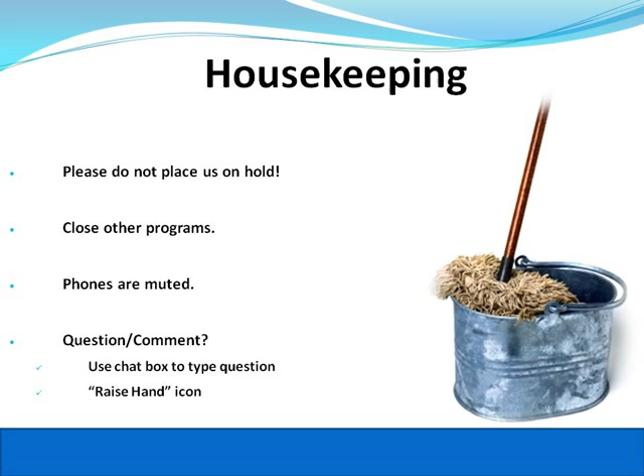Hello, I'm here. Thank you very much for listening, and you'll have the good chance that you'll have a recorded session with my Swinglish accent. So I'm glad to be able to talk about gasification and mass burn comparisons.

I would just like to jump into the first screen. So if we compare technologies in a general way, obviously we have to look at various things. One of it is obviously the criteria under which we compare two technologies or two solutions. And those criteria mentioned most in the waste management industry obviously are diversion rates or emissions, as well as energy efficiency.

Also, if we want to do a comparison, we have to look at the method, how we compare two different solutions or technologies. And the method that I would like to show here is basically looking at trying to make sure that we use the same boundary limit and same assumptions for those comparisons, and we'll have a heavy focus on detailed mass and energy balances within that same boundary limit to compare various solutions and methods. And that's exactly now where I have to put a first disclaimer about the content of that presentation.

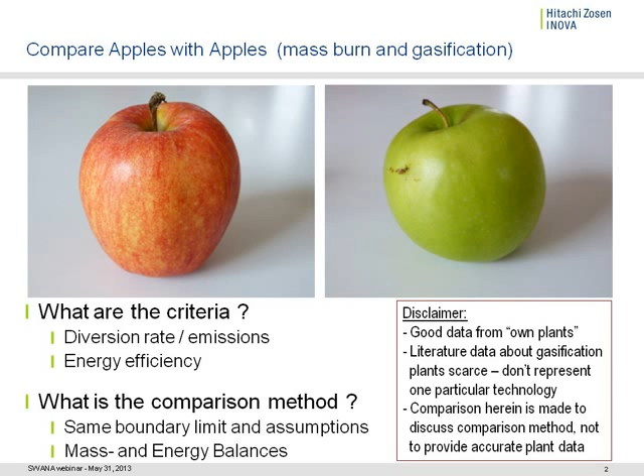So let's first look at the first topic, which is define the boundary limits. And I think for me, it's very important that you fix those conditions for all the comparisons.

What I did in this comparison, I looked at the MSW feed that we typically see as delivered from curbside collections. Then we also have to include consumables, reagents, and other utilities used, and these could be very different for different technologies, but it's important to consider all of them in the comparison. Then we have to look at the residues which go to disposal and at the recycled products.

In some areas, and depending on legislation, it's not always clear what products out of the system are considered a recycled product or have to be considered a residue for disposal. This depends a lot on legislation and on established routes for a certain product in the market.

Then also we have to look at emissions, and it's very important here that we have to look at emissions after the work is done. I've seen a lot of people that compare different technologies and say, well, I am producing only a syngas, I have zero emissions. I don't think that's the full system that we have to compare here, because at the end sometimes a syngas or even a liquid fuel is combusted to produce the work it's supposed to produce.

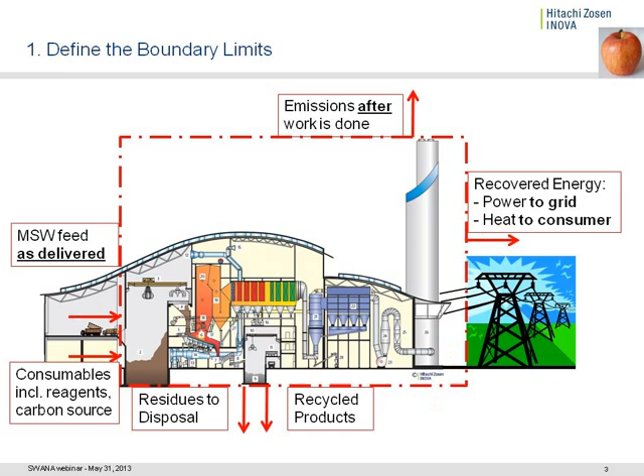Now, we have to also, if we want to do a comparison, define the feed stream. And in all the comparisons, we have to use the same feed stream.

In this comparison, I've used an ultimate analysis that you can see here, which is typical for some curbside collected waste. Important also to see that the heat value for any comparison has to be clearly defined or recalculated during the comparison. Also, the dimensions are an important factor.

If I see usually feed that's delivered from the curbside, it can contain particles or elements up to several feet of size, can be bulky or in bags. Whereas I've seen comparisons that assumed that already the feed stream is a little fluffy RDF type treated product.

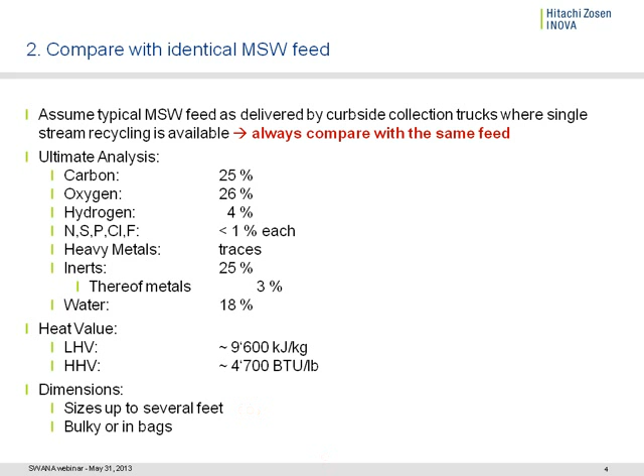Mass balance considerations obviously not only have to consider the ultimate analysis and total mass balance in terms of total mass stream, but for all the mass balance considerations, we also have to look at component mass balances. We will go into a little bit further detail about component mass balance considerations.

Important here is that for every component or contaminant that we have in the feed stream, in the waste stream, we have them—we cannot just choose not to have them. We have to know for each step what the distribution coefficients are, why would that contaminant go this way or that way, and so at the end we know where these contaminants end up in the process.

And I've seen one question—LHV stands for lower heat value, which is typically the method used in Europe. And HHV is the higher heat value, which is typically the method used here in North America.

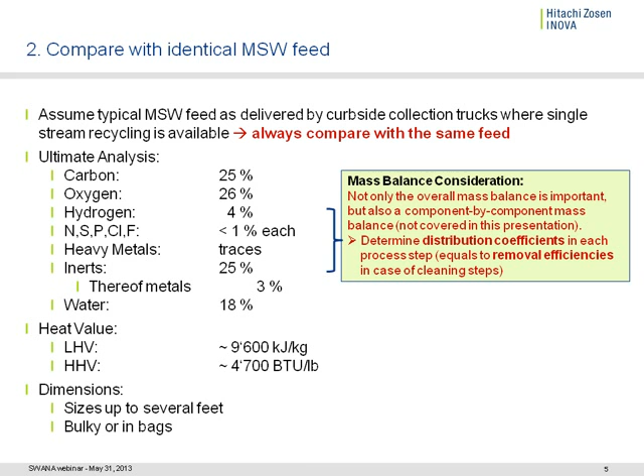Now, for energy balance comparisons, it's very important that we use exactly those heat value numbers. If we look at an LHV basis, basically the LHV basis assumes that at the end of the process all the water is still in a vapor phase, although the energy basis for that comparison is typically either 0 or 20 centigrade, which is 32 or 68 Fahrenheit—that's typical the comparison temperature level for all these energy considerations. So actually water would be naturally in its liquid form for this comparison.

But since for energy purposes, normally the water is always in a gaseous form in the flue gases as a vapor.

The LHV concept assumes from the beginning that the water for the comparison method is not considered to be in a liquid form but in a vapor form. So comparing on an LHV basis, these 9,600 kilojoules per kilogram would translate directly to 2,427 kilowatt hours of energy per short ton of waste.

Looking at those numbers, if someone says this figure is frequently used, that someone can produce more than a megawatt hour per ton of waste, then with this waste typically received from the curb, that would correspond to 41% total net energy efficiency.

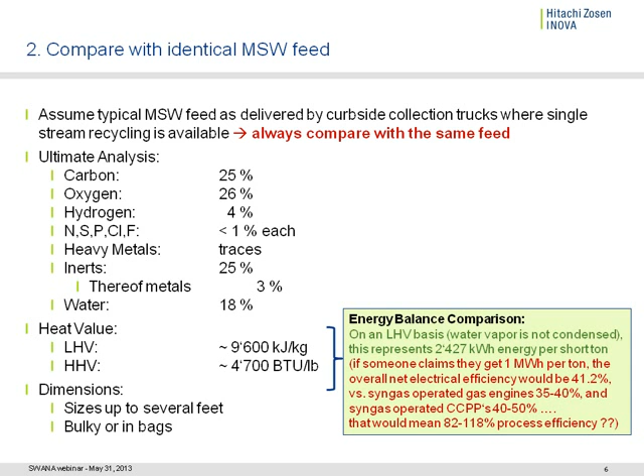If someone just says they can produce a megawatt hour per ton of waste, it's very important to look at the assumptions: what waste has been assumed, what heat value of the waste has been assumed, and what other assumptions are considered. Now let's start with a modern mass burn example.

We built a unit in 2011 in London, the Riverside unit, located next to the Thames River. It has 3 combustion lines, each about 840 tons per day. It uses MSW as delivered and collected by the collection vehicles in the city and area of London. They bring it to the transfer stations.

They bring the waste onto barges on the Thames River. The barges deliver it to the plant, and it generates steam and electricity. It's prepared for cogeneration, so in the future steam could also be used, but at the moment this plant produces about 73 megawatts gross, and can sell about 65 megawatts to the grid, which corresponds to 662 kilowatt hours per ton of the same typical MSW I've used before as a basis for these comparisons.

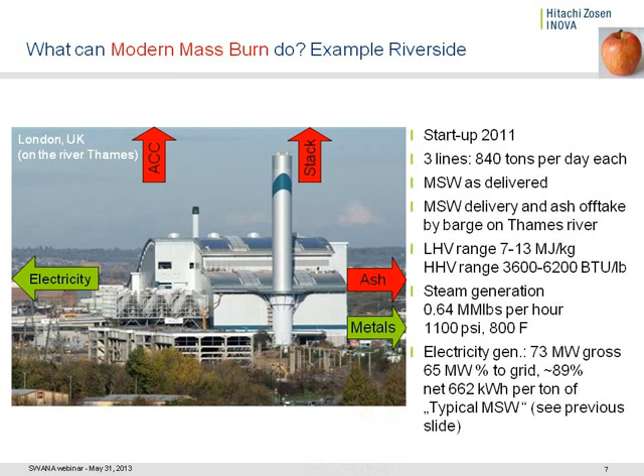So let's go a little more detailed into these mass balance comparisons. I always like to see graphical comparisons like the Sankey diagram, which I find very helpful.

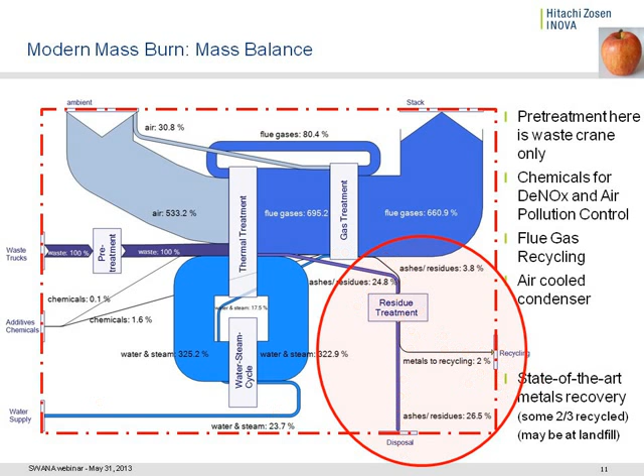Let's now go to the energy mass balance, and you'll probably see, if you compare to the previous stream, I go back again to the air streams here, where you see that the air streams are the biggest streams in terms of mass. You will see on this Sankey diagram for energy balance that here the air stream at ambient temperature actually contains no energy.

So again, this energy balance is based on a lower heat value basis. It's made under the assumption that the water in the waste is just reducing the heat value, and that the water vapor in the flue gas stream contains no energy.

In this case, we have the waste trucks coming in with the waste, and again, we normalized the energy content of all the streams, the energy streams in the whole system here, such that all the energy, the chemical energy content of the waste, is 100% of the energy.

So in this case, we also have the chemicals again. In this case, we considered the chemicals' energy content is close to zero. They are at ambient temperature, and the little chemical energy contained in, for example, the ammonia which will react, is assumed or neglected in this case.

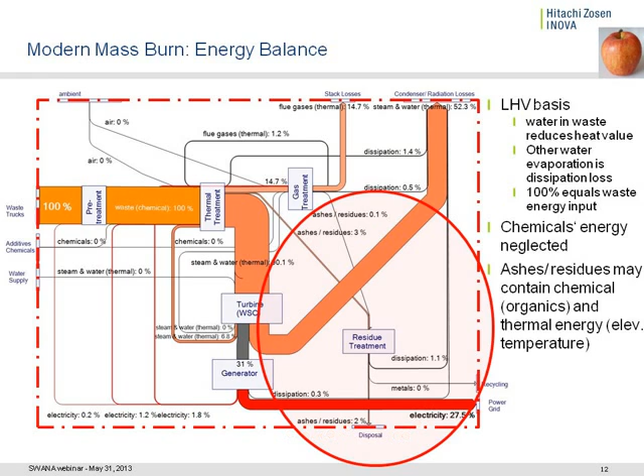As a next example, we have used a few technological improvements that we did in the past, and which we will apply to one new plant to be built in Lucerne, Switzerland. That allows us to further reduce the excess air, also further increase the energy efficiency.

We have also used some other concepts, the ThermoRe concept, in this plant in the UK, where we would propose a dry bottom ash extraction, which allows us to further reduce the energy lost with the organics in the ash, and further cool the ash, reducing thermal energy losses. We also increased the metals recycling rate with this concept, and we assume in this case that even the mineral fraction of the ash can be recycled at 50%.

This is today possible in certain legislations, but not all. It very much depends on the legislation whether the mineral portion of the ash can be beneficially used, or whether it has to be considered a residue that goes for disposal and therefore doesn't contribute to the diversion rate of the whole process.

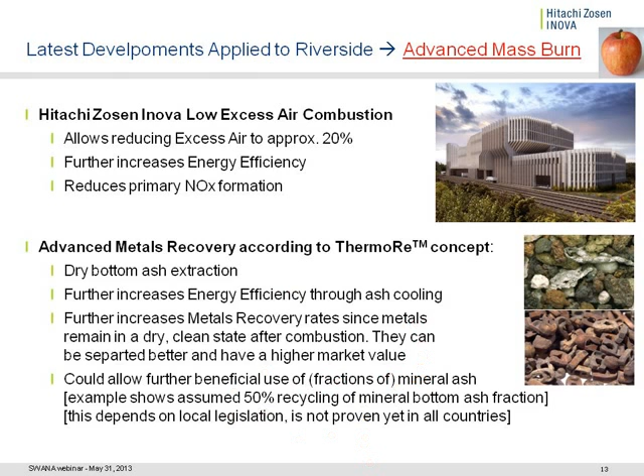If we apply those two recent developments to our UK unit, we'll have again a very similar mass balance diagram, with a few little changes. One is that because we can reduce the excess air for combustion, we'll need a lower amount of air and have a lower amount of flue gases leaving with the stack. While this number was 660% in the previous example, here we have only 570% total flue gas stream mass flow compared to the total waste mass flow.

Also, the ThermoRe concept allows some changes in the residue treatment area. While last time we had only 2% metals recycling, here we assume we can recycle virtually all the metals, certainly 90% plus of the metals contained in the waste stream. We also assume we can recycle about half of the mineral fraction, which, however, needs to be confirmed and may be different from country to country depending on the legislation.

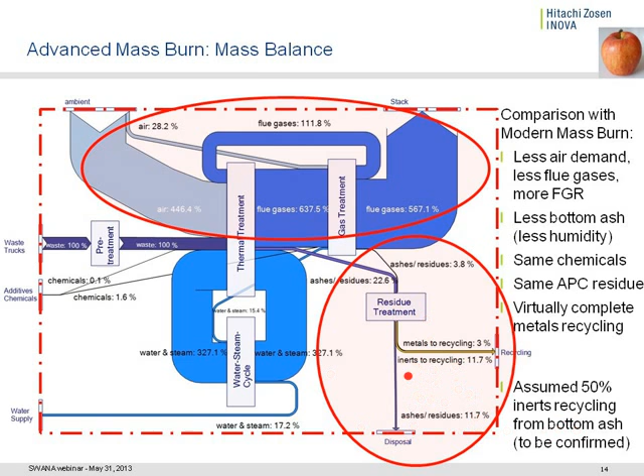This would be the mass balance diagram of such an advanced mass burn unit. Let's go into the energy balance side of it. If we look at the energy balance of a modern unit,

we would see that the stack losses here could be reduced. With less excess air and less mass flow going through the stack, we also have less thermal energy losses through the stack. Because we have less excess air and less flue gas flow, we also have a lower parasitic load to drive the fans in the flue gas treatment.

In the residue treatment, because we can recover the ashes in a dry form and recover some thermal heat of the ashes, we have less energy losses with the ashes. We also have less energy losses because the burnout is better, with less chemical energy or organic materials in the ashes, which in a normal waste-to-energy plant are maybe only 2 to 3%, but with this technology you could typically go down to 1 to 2%, which can all be measured.

Looking at all the little improvements on the parasitic load and the losses with the flue gases and the ashes, this would give an overall electrical efficiency up from 27.5 to 28.2% electricity available to sell to the grid, compared to the chemical energy contained in the model waste assumed for all these comparisons. If you want to use that 28.2% figure in comparison with other processes, there is one plant in the Netherlands, AEB Amsterdam, which has used

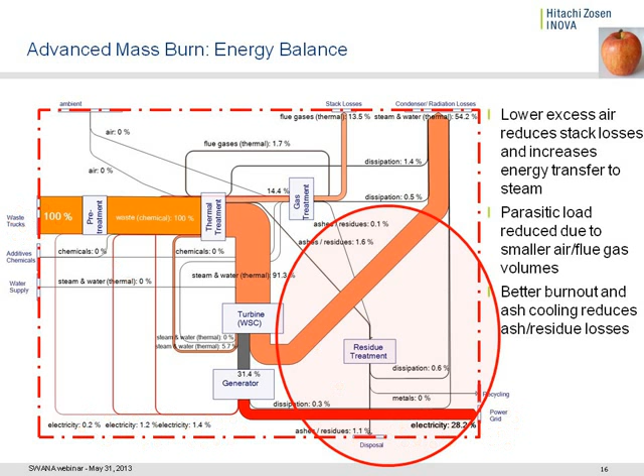I mentioned at the beginning that we don't have to look only at mass balances in terms of total mass flows, total mass streams, being where does my one ton of waste end up, but we also have to look at the component mass flows if we compare different systems with each other.

There has been a pretty thorough analysis of the total mercury system in Austria recently, and they have looked at just mercury. Where does mercury enter my country? Where does it leave the country, either to the air or to any landfill space? They figured out that about 10% of the total mercury in the loop in Austria at the end somehow ends up in municipal solid waste. So there's an amount of mercury coming in with your curbside collected waste. If I recalculated that, it would be probably some 100 milligrams per ton of waste if you average it out.

But whether you want it or not, that mercury will be there in your waste. And it's very important, if you do comparisons between different solutions, that you also follow the components. So I've made the same comparison here that I did before on a mass stream basis for a total waste mass stream, only for the mercury.

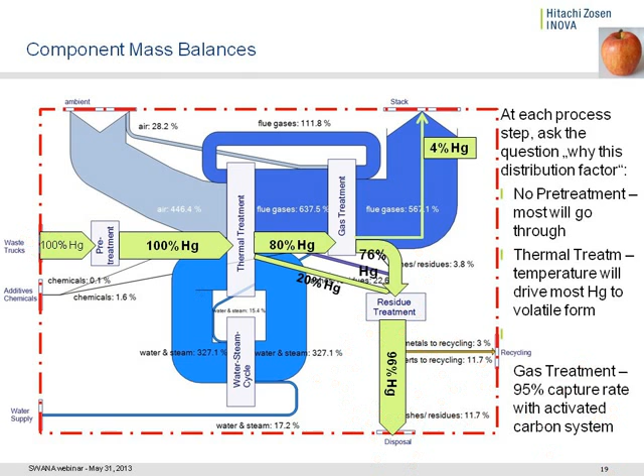Now, a lot of the technology comparisons also have some link to Japan, because the Japanese, for many reasons, use a variety of technologies, including a lot of gasification technologies. Most gasification technology plants actually operate in Japan. So we looked at one of the gasification melting systems that we know a little bit better. It's not one-to-one comparable with our comparison before, so we had to make some adaptations in terms of the assumptions regarding waste, so it's comparable. But typically that unit is very small, like most or all of the Japanese gasification units.

This one treats RDF, which is pre-treated, so it's not curbside collected waste — pre-treated, pre-dried. So a lot of the inerts contained in the raw waste as you get it from curbside collection are already eliminated. For this comparison, we've considered literature data of one of the RDF processes, and this plant also uses melting technology to melt down the residues they still have in the end.

So they have an inert ash or inert slag in this case, and also probably because the unit is very small, we didn't assume that the slag is further separating metal fractions and inert and mineral fractions from the slag.

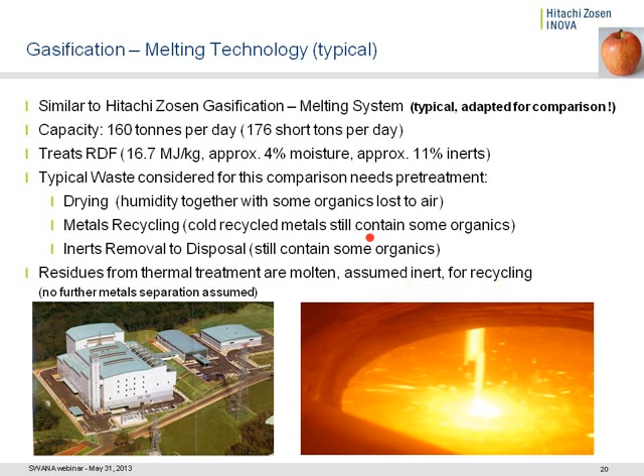But this would be the process to look at. We have, in this case, a pretreatment, and the process technology used for that gasification melting plant requires a pretreatment. That pretreatment needs drying, so a lot of the humidity and possibly some organics with the humidity, you cannot avoid that, will leave the pretreatment to the air.

And again here, if we make a comparison, for example, on a carbon footprint basis, then we'll have to look at how much organics are leaving here and what's the carbon CO2 equivalent factor of those.

Then they typically have a waste stream that's only about 50%, but since they have to remove the big and inert pieces, they have a stream that goes from the pretreatment directly to the disposal. So we have to look at these inert residues here, and these residues have to be considered in your diversion considerations. You cannot only look at the treatment step here, the thermal treatment step.

Then if you look at generally the flow sheet, you will see that probably flue gas amounts are similar because they take most of the energy content into the thermal treatment. They also have similar flue gas amounts.

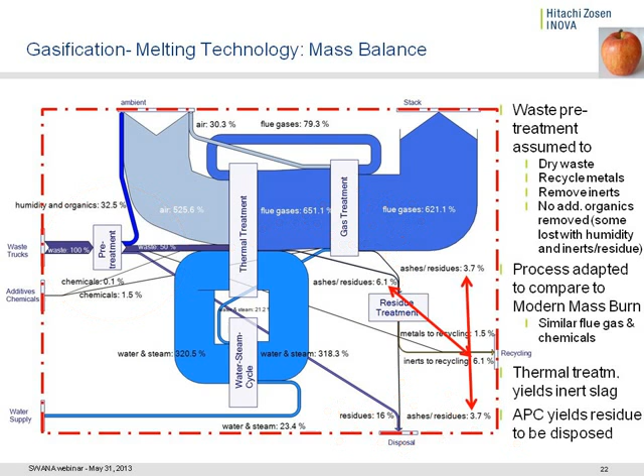Going into the energy consideration of this process, we have assumed that the pretreatment is able to carry 95% of the energy into the thermal treatment, which, as I heard in the past when I discussed with a few people, is a very ambitious number. A lot of the pretreatment, I've been told, will not achieve 95% of the energy content of the waste coming in, ending up in whatever RDF, or however you call it, the product that you will bring into the thermal treatment. So this is an optimistic number here.

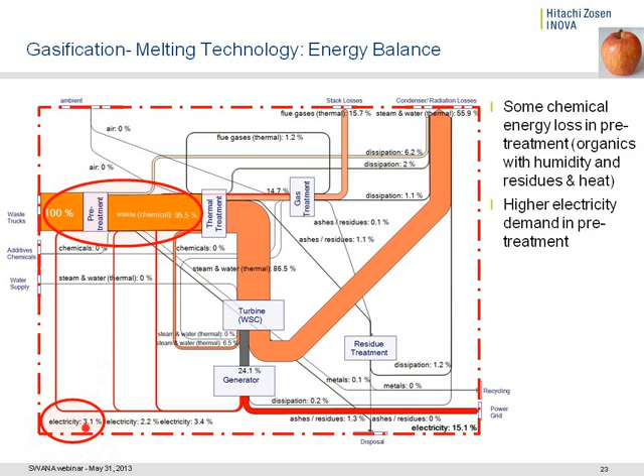Also, you can see as a difference, the pretreatment consumes electricity. So we had to use an average number for the pretreatment as an electricity consumption, which definitely reduces the energy available for the grid.

We have another thing we would like to look at here: the plant in Japan is a very small plant. So as a very small plant, it has a turbine generator as well, but the generator efficiency for a very small plant is rather low. This is one of the reasons why many of the Japanese small plants are operating at very low electrical efficiencies, not only because they have other inefficiencies here, but because of the size of the plant, turbine efficiencies drop very fast.

So this is one of the explanations, obviously, in addition to the higher electricity need in the pretreatment, and also in addition to the lower efficiency of the turbine generator used. That's one of the reasons why electrical efficiency is rather small.

But generally, if you compare mass burn and gasification units, there also seems to be some technical limit with many of the gasification technologies, which doesn't even allow them to build larger plants unless they just duplicate gasifiers. So I don't know how much this is just a structural limitation, that in Japan many plants are very small because they have small communities and the small communities need their own disposal method, or whether that is at the same time some technical limit, that thermal plants that have a partial gasification or melting step are probably better smaller than larger.

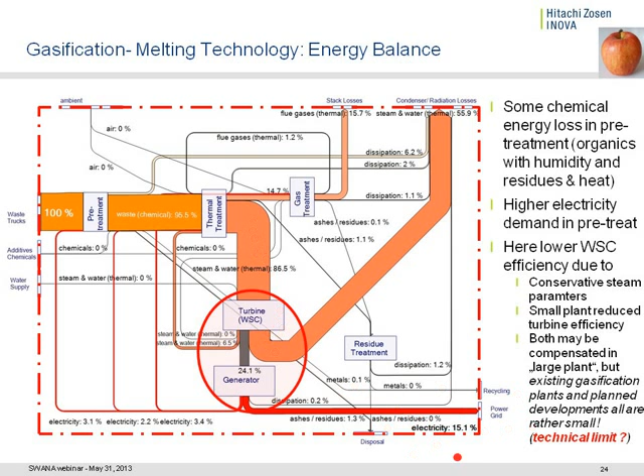But this is the overall electrical performance of that step now. So going to the plasma gasification, syngas cleaning, gas engine process that I wanted to compare on the same basis. And again, please remember my disclaimer at the beginning: this is not one process.

This is a hypothetical or theoretical process established from various data we found in the literature. Probably this is one of the problems if we try to compare those different technologies: the literature data or data available of those processes is pretty scarce.

A lot of the technologies are operating on a kind of proprietary, secret, technical new technology approach. So obviously those numbers cannot be scrutinized to the detail, and you are pretty much depending on what the people offering those technologies tell you.

But to compare with other plants, also here we have included a pretreatment step, since most gasification systems need a thorough pretreatment and size reduction. We have found one or two technologies that require some carbon source additives or flux material additives. They have different names, but we've included those.

We have seen that some technologies operate with oxygen rather than air as an oxidation agent. The residues in this case are assumed molten, inert, and suitable for recycling, so we've assumed that all metals would have been recycled and separated here. We also assumed that some residues from syngas cleaning need to be landfilled at the end, although that's the most difficult part to find in the literature.

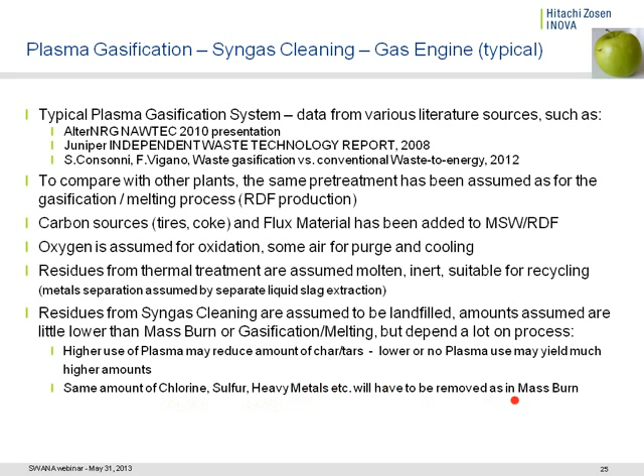And obviously there's little data, but again, if you want to take all the heat and the chemical energy in the waste, then you also have to take all the chlorine and the sulfur and the heavy metals load in the waste. So we have assumed that some of that has to be removed as well in syngas cleaning.

So again, what I said before, if 100% is the waste stream, in those cases we have an additional carbon source or chemical requirement for the thermal treatment step, and also some chemicals. We've assumed in this case probably the same amount of chemicals needed for the syngas cleaning to get all the contaminants out.

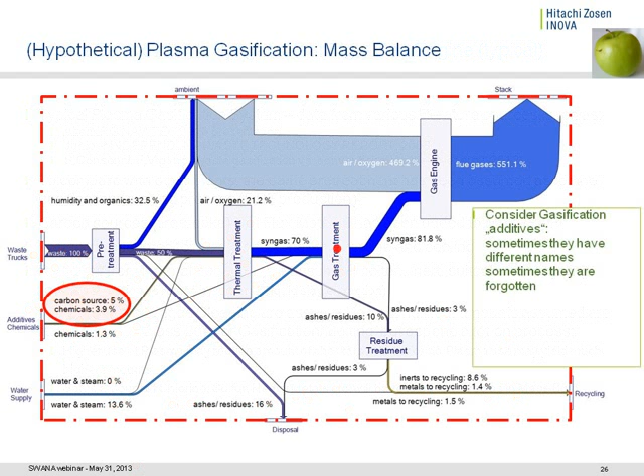This is one of the aspects which many gasification people say: if you compare the total gas volumes that need to be handled in a gasification process, in this case it's only 80% of the waste mass flow. While if you look at the same diagrams before for mass burn, the main process deals here with 500% of the mass, due to the big amount of air needed for the thermal treatment step and the gas treatment step.

But if you look at the overall picture in terms of emissions, you see that latest when you want the syngas to do the work it's supposed to do, or the fuel to do the work it's supposed to do, then latest at the gas engine or the vehicle or any other step, you will need that air again, and you will have flue gases of a similar magnitude, 550%, 600%, at the stack.

Although obviously I've heard people differentiate and say, well, in their case this is an exhaust pipe, not a stack, so you have to differentiate. But if you look at the mass balances and later the component balances, I wouldn't make a difference between a stack and an exhaust pipe.

Next question is ashes and residues. As mentioned before, some of the gasification processes would include melting of the solids. That would include here maybe 10%, which can go into recycling as a slag, or if they take metal out as a liquid form, that would go into recycling as well.

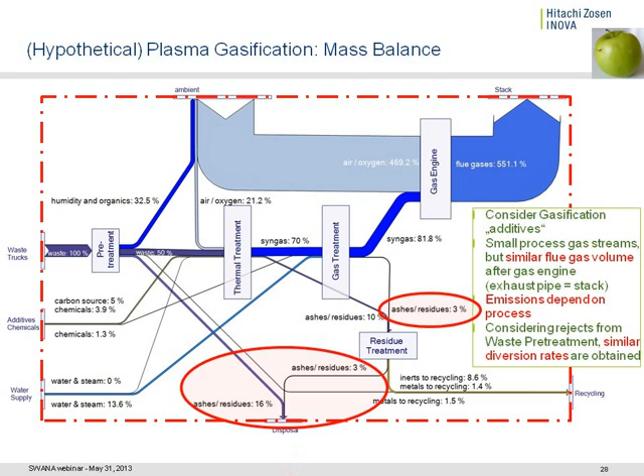Next thing is a component mass balance. Again, it's very important that you look at the whole picture. As I said before, whether you want it or not, you will have some mercury in your waste stream coming from the curb. So what would a pretreatment do with the waste stream? I have to put question marks here because I have no idea at the moment how much of the mercury would leave with the vapor from a pretreatment where the waste is dried, and I don't know how much of the mercury would be going with the solids that's separated.

I think this would probably be rather small, and most mercury would go into the thermal treatment step. Next, if you have a thermal treatment, first you ask the question: how do you assure that you get all of the chemical energy of the carbon out of your thermal treatment? The response is that they have very high temperature, or plasma assisting the whole process. That would be a reason for me to believe that you cannot at the same time have all the mercury go with the inert slag. This will mean the mercury will go into the gas phase as well, into the gas treatment.

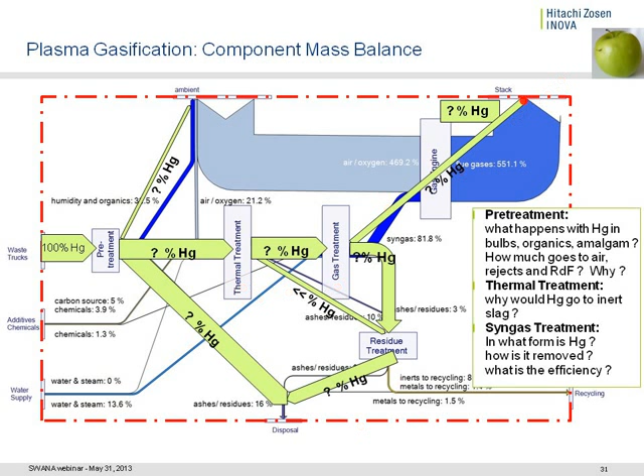From the gas treatment, the question will be how much of the mercury can be captured, and in what form is the mercury present in a gasification? Is it metallic? Is it ionic? Is it attached to some particulates, or is it just pure gas form? Depending on that answer, you have to find out why mercury in the syngas treatment would go one way or another. So in the end, to have the overall component mass balance picture, you have to know a lot more details about processes in thermal treatment, gasification, as well as in the syngas treatment. But still, there is a question that the exhaust pipe, as they call it, will also become a stack and will also contain mercury, and will need to be regulated under appropriate emission regulations.

Energy now is, again, questions that you can ask. Can you get 95% of the energy into the waste material that goes into the gasification? Very important here is that the additives, as they call it, either flux material or carbon source or other things, sometimes contain a very significant amount of chemical energy. In this case that I've looked at, in the end the hot syngas would contain even 107% of the chemical energy compared to the waste at the beginning. This is not because they made something very fancy with the waste, but because of all the energy content of their additional carbon source that comes into the thermal treatment.

So then again, you have cold syngas efficiency that you have to look at depending on the process. Then obviously the syngas will very often need to be quenched, so you have a dissipation loss for quenching syngases. You have dissipation losses because you have to cool a plasma torch, or because you inject some other media. You also have dissipation losses in the pretreatment, where you obviously lose some VOCs with the gas.

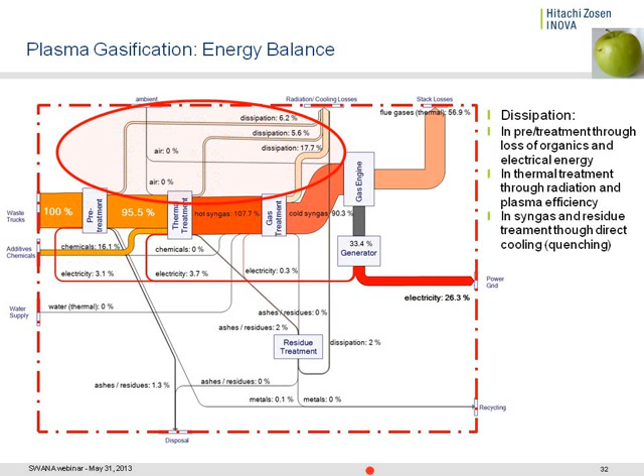And that's the very interesting thing: obviously the electrical efficiency of a gas engine is very high. In this case I've assumed 37.5%, and I realize there are new developments where you could combine an ORC cycle to capture additional heat from the exhaust pipe of your gas engine, or maybe in the future use a gas turbine for the syngas, although the question is always whether the syngas is clean enough to do that. But if you make the balance now with the 37.5%, a number I found in literature as the electrical efficiency of a gas engine for syngas, then you would end up with that much electricity if you subtract the electricity required for the gas treatment, the plasma torch, the pretreatment, and so on.

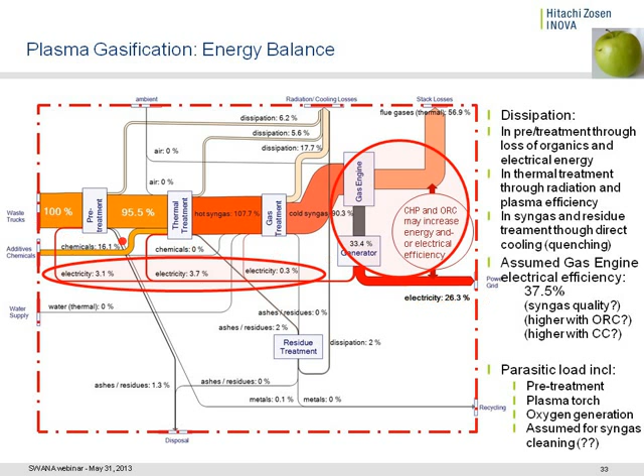So if you look at 26.3%, you could say, well, that's great too, but this is obviously the electrical energy that you can get out compared to 100% waste, if you first add 16% of energy from a carbon source. So if you take that out of consideration again, subtracting the energy coming in from the carbon source, then in this example you have only 22% electricity coming from the waste and available at the end for the power grid.

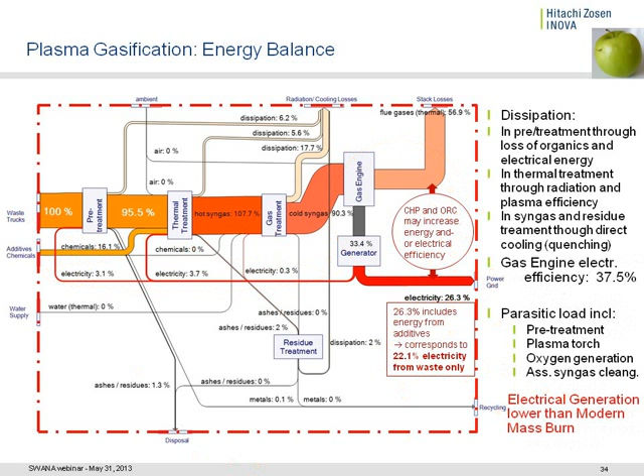Again, with improvements here, adding an ORC, I think that number of 22% can also come to the area of 30%, but that would be the number I would make with an overall comparison.

So let's compare those few technologies, modern mass burn and some advanced technologies.

Diversion rates: today, a lot of the diversion rates for mass burn are looking at 70 to 80%, on the assumption that you cannot beneficially use the mineral fraction. I think there will be technologies that would allow at least partial use of the mineral fraction. In some countries in Europe, the mineral fraction is reused today. So diversion rates can certainly go up to far above 80%, close to 95%, if you assume you need the residual final 5% to dispose of the contaminants in the waste stream.

Also, the gasification technologies, if you look at the pre-treatment requirements and assume there are still some residues from syngas cleaning, are in the 80% plus or minus range.

The recycling of metals today is obviously rather in the 50-70% range. With our thermal concept, I think we can certainly get above 90% metals recycling. Gasification, of course, you can also do metals recycling over 90% today if you look at separating metal melt.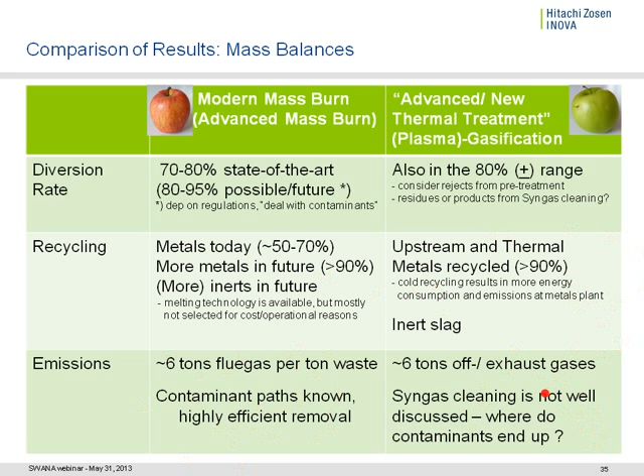Emissions from a modern waste-to-energy plant at the stack: about 6 tons of flue gas per ton of waste. If you look at the gas at the exhaust pipe after the syngas has done its work, you will also end up in the order of magnitude of 5-6 tons of off-gases from the whole overall process.

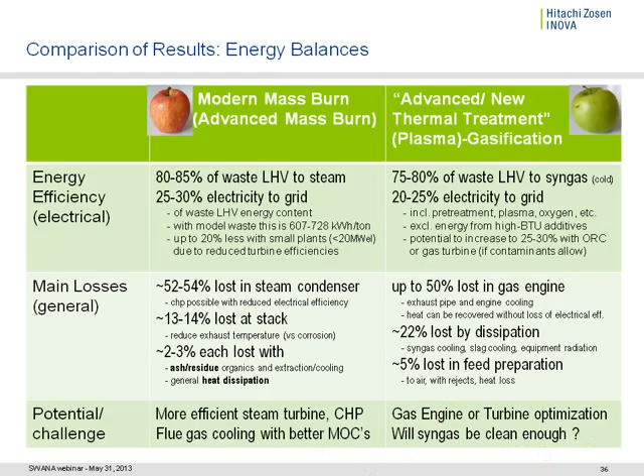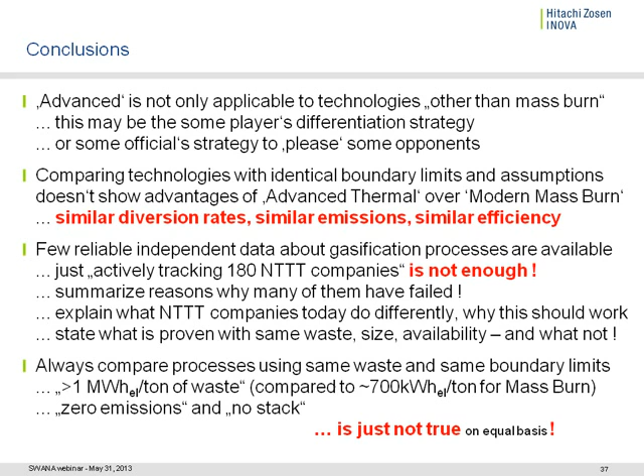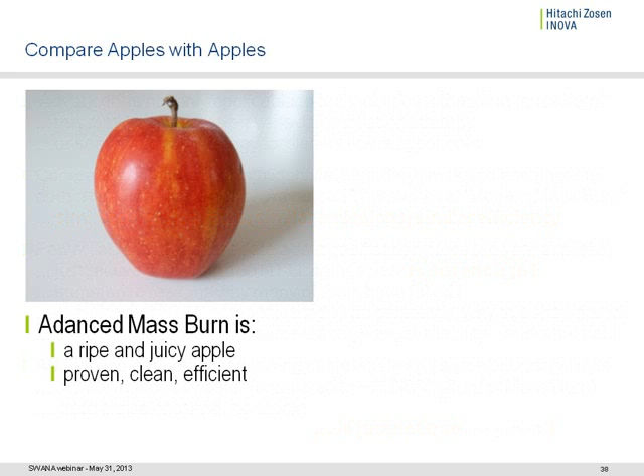Again, mass burn, advanced mass burn is a ripe, juicy apple. It's proven, it's clean, it's efficient, it operates more than 8,000 hours a year, it's bankable. While on the other side, new thermal technologies, sometimes you could still call them green, in terms of not fully matured and proven yet on an industrial scale. If you compare those two technologies, you have to be careful that you are not comparing only part of the apple with the full apple in certain systems.

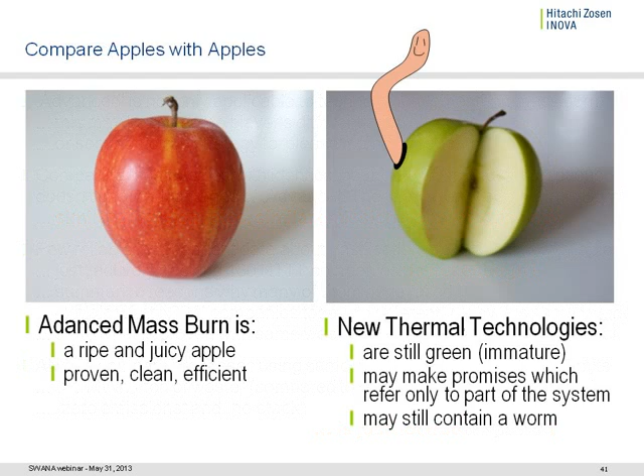And if you compare them, you also have to make sure that you'll not find a technological worm here or there, in terms of assumptions or claims that are made which are not yet proven on a technological scale. That would conclude my presentation for today, and I think we are pretty much in the one hour range and could probably open the microphone for some 15 minutes of questions and answers.